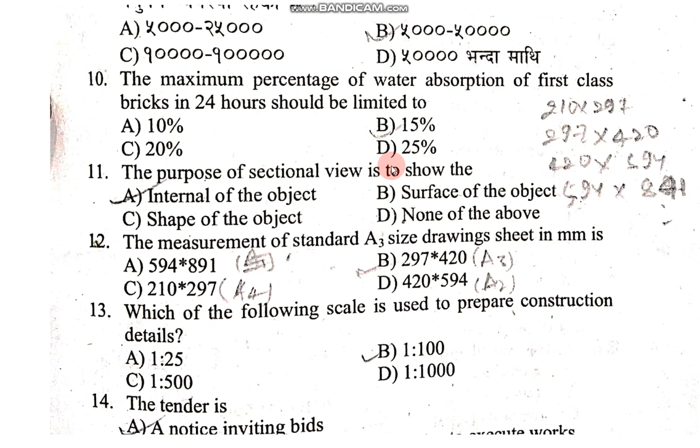Question number 11: the purpose of sectional view is to show the internal details of the object.

Question number 12: the measurement of standard A3 size drawing sheet in mm is 297 by 420. For A2 it is 420 by 594, and for A4 it is 210 by 297.

Question number 13: which of the following scale is used to prepare construction detail, 1:100. Question number 14: the tender notice is a notice inviting bids.

Question number 15: in the completion of a project, the critical path of the network represents minimum time.

Question number 16: if A is the optimistic time, B is the pessimistic time, and M is the most likely time of an activity, the expected time of the activity is A plus 4M plus B, all divided by 6. Question number 17: the most reliable estimate is detailed estimate.

Question number 18: the main factor to be considered while preparing a detailed estimate is all of the above, meaning quantity of material, availability of material, and transportation of material.

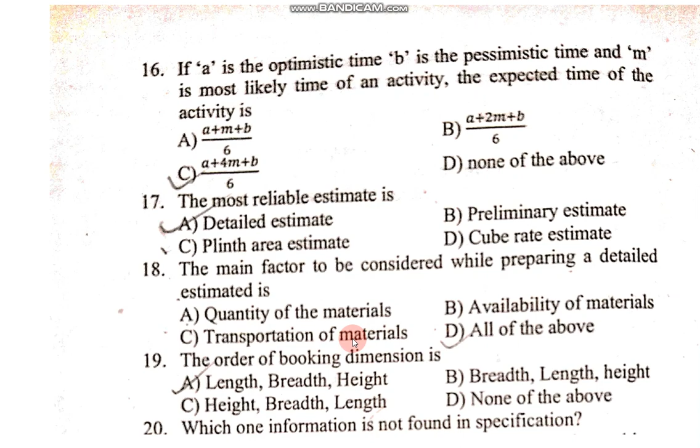Question number 19: the order of booking dimension is length, breadth into height.

Question number 20: which information is not found in specification? The answer is dimension; specification usually does not include dimension. Question number 21: the sewage treatment in septic tank is due to anaerobic decomposition.

Question number 22: priming is the process of removing the trapped air from the pump. Question number 23: BOD of treated water should be nil; treated water's BOD should be zero.

Question number 24: which of the following waterborne diseases is caused by pathogens? The answer is all of the above, such as option A cholera, option B typhoid, and option C infectious hepatitis.

Question number 25: the specific weight of water in SI unit is 9.81 kilonewton per cubic meter. The first stage in water treatment is sedimentation.

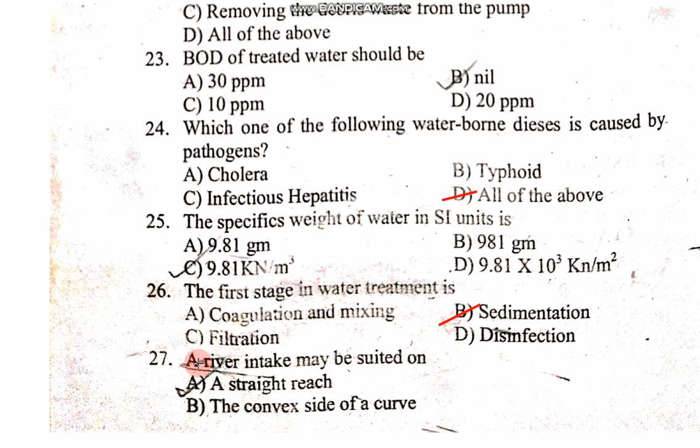Repeating: the first stage in water treatment is sedimentation. Question number 27: a river intake may be situated on a straight reach.

Question number 28: the shape of sewer suitable to carry combined flow is egg shaped. Question number 29: practical fluid possesses viscosity, surface tension, and compressibility.

Option D, all of the above is correct. Question number 30: the basic head loss in a long pipe is due to friction.

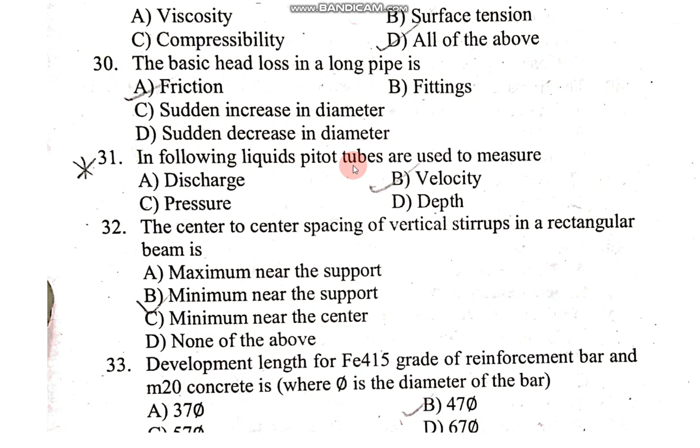Question number 31: in flowing liquids, pitot tubes are used to measure velocity. Question number 32: the center to center spacing of vertical stirrups in a rectangular beam is minimum near the support.

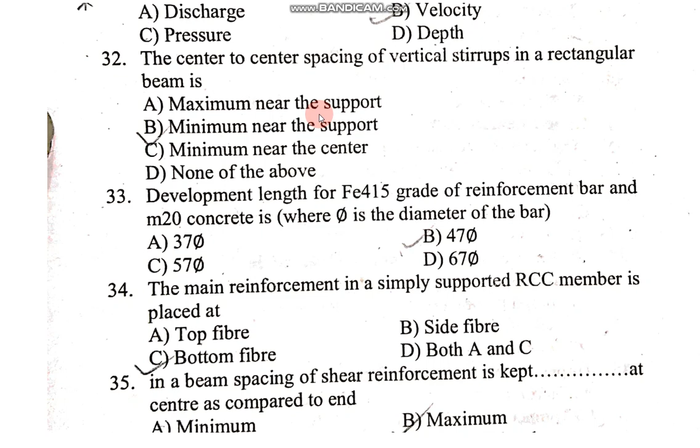Question number 33: development length of FE 415 grade of reinforcement bar and M20 concrete is where phi is the diameter of the bar. Option B, 47 times the bar diameter.

Question number 34: the main reinforcement in a simply supported RCC member is placed at bottom fiber.

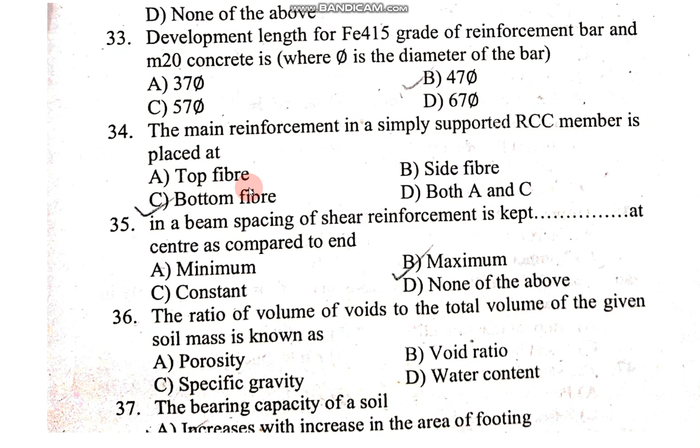Question number 35: in a beam, spacing of shear reinforcement is kept maximum at center as compared to end.

Question number 36: the ratio of volume of voids to the total volume of the given soil mass is known as porosity.

Question number 37: the bearing capacity of soil increases with increase in the area of footing.

Question number 38: the relationship between void ratio and porosity is E equals N into 1 plus E, which can also be stated as N equals E upon 1 plus E.

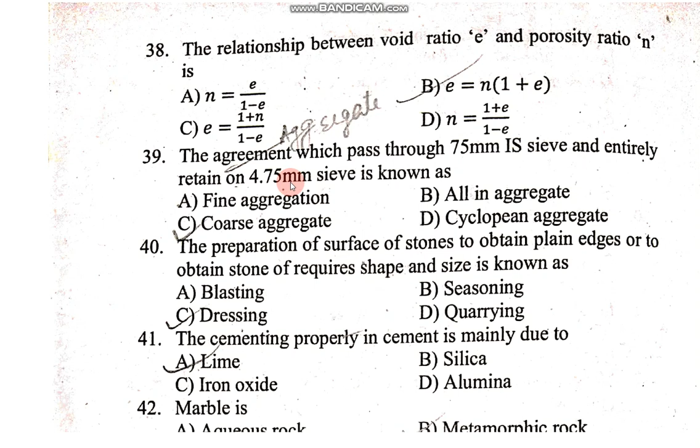Question number 39: the aggregate which passes through 75 mm IS sieve and is entirely retained on 4.75 mm sieve is known as coarse aggregate.

Question number 40: the preparation of surface of a stone to obtain plane edge or to obtain a stone of required shape and size is known as dressing.

Question number 41: the cementing property in cement is mainly due to lime. Question number 42: marble is metamorphic rock.

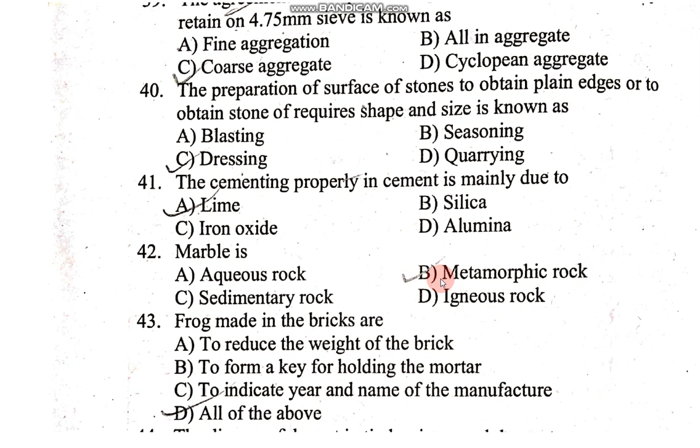Question number 43: frog made in bricks are for option A to reduce the weight of the brick, option B to form a key for holding the mortar, option C to indicate year and name of the manufacturer. Option D, all of the above, is correct.

Question number 44: the disease of dry rot in timber is caused due to lack of ventilation. Similarly, turpentine oil is used in paint as thinner.

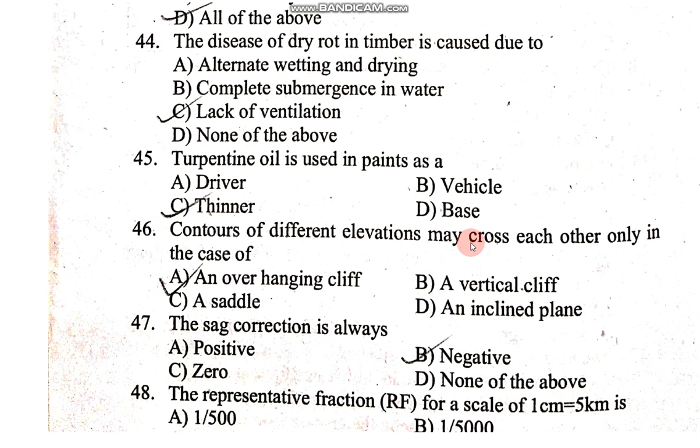Question number 46: contours of different elevation may cross each other only in the case of an overhanging cliff. Question number 47: the sag correction is always negative.

Question number 48: the representative fraction for a scale of 1 cm equals 5 km is 1 upon 5 lakh, which equals 500,000. For 5 kilometers, multiply by 1000 and by 100.